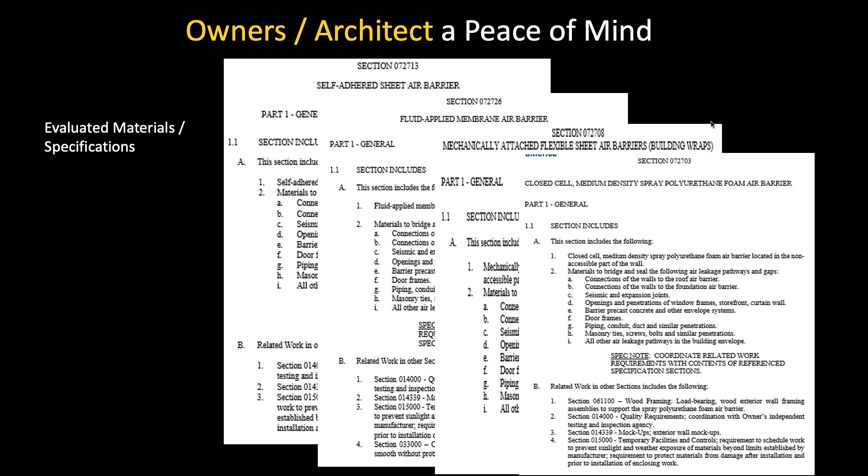So ABAA QAP - I'm going to touch on our three main stakeholders in our industry, starting with owners and architects. The QAP is there to give you peace of mind, helping you know that you're getting evaluated materials to our industry standards.

Focus on this primary barrier: if you specify the QAP, or the owner asks for it, you know you're getting trained and certified installers. What does that mean today? For the last 10 years, traveling the country, I've never heard an area say we've got so many great installers we don't know what to do with them - everywhere there's a labor shortage.

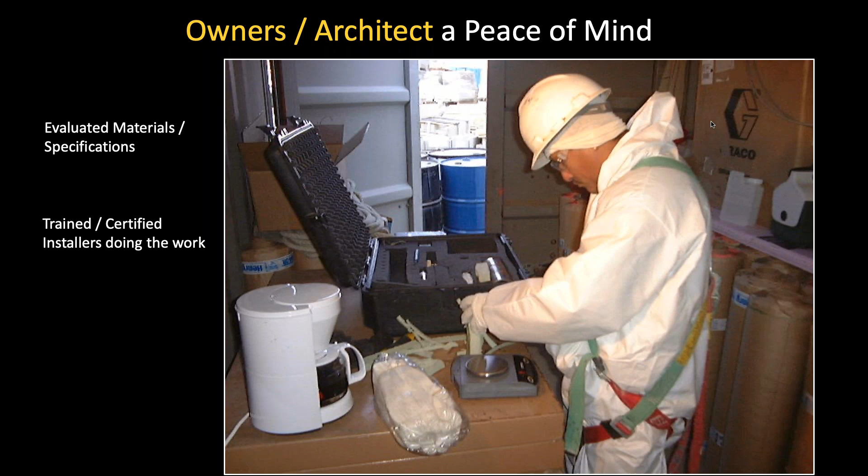With the QAP, you're assured that you have people trained on your project, and you're also getting a third-party auditor coming out to review the project - kind of like the scientific method: plan, do, check, act. Planning using the material specs, doing the installers, checking the auditor, and then we at ABAA do the acting and adjusting as we continue to evolve this process.

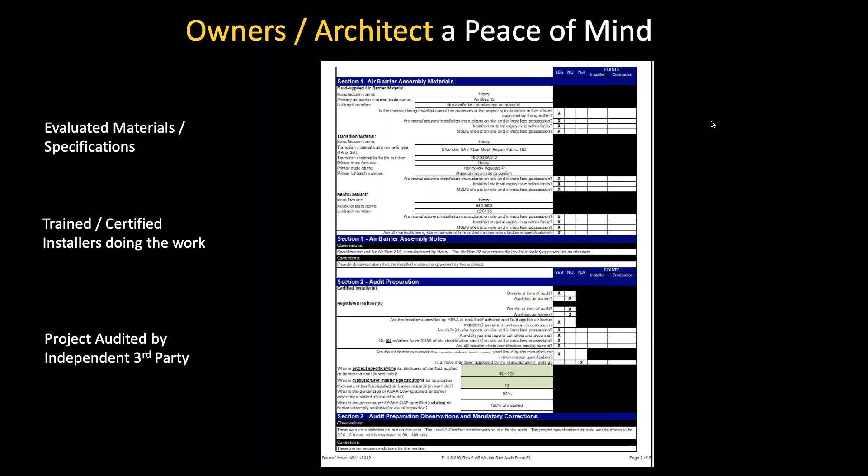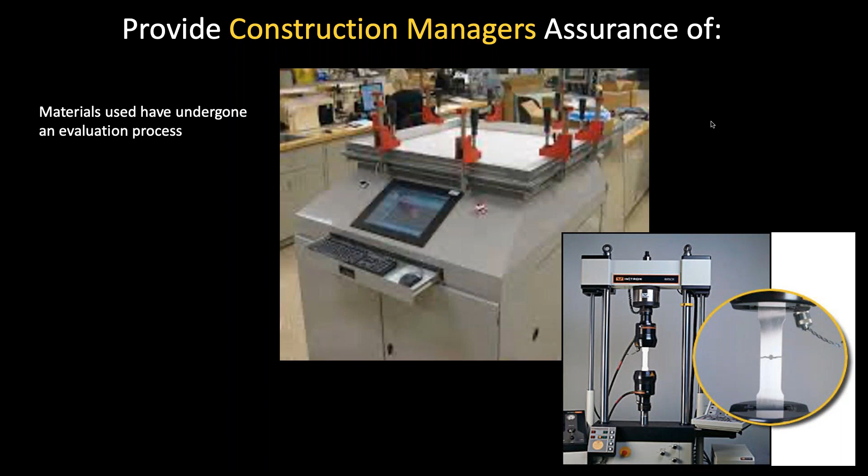If you're a construction manager, what are some of the benefits? Again, knowing you have good materials - there are a lot of different materials out there - this way you can compare apples to apples when you're bidding things out.

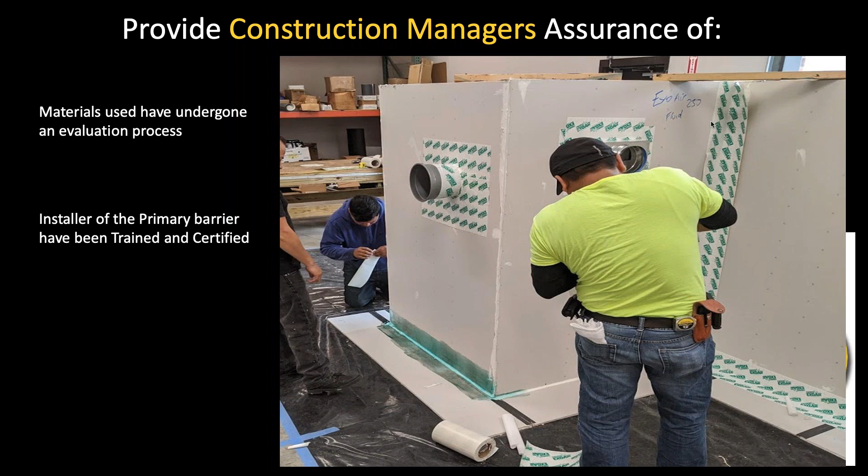Again, the idea of that trained, certified installer - these installers have to go through a 3-day training that requires them to pass a written exam. It's an ISO 17024 certification program. And then again, having that auditor come out, that third party, another set of eyes for your project.

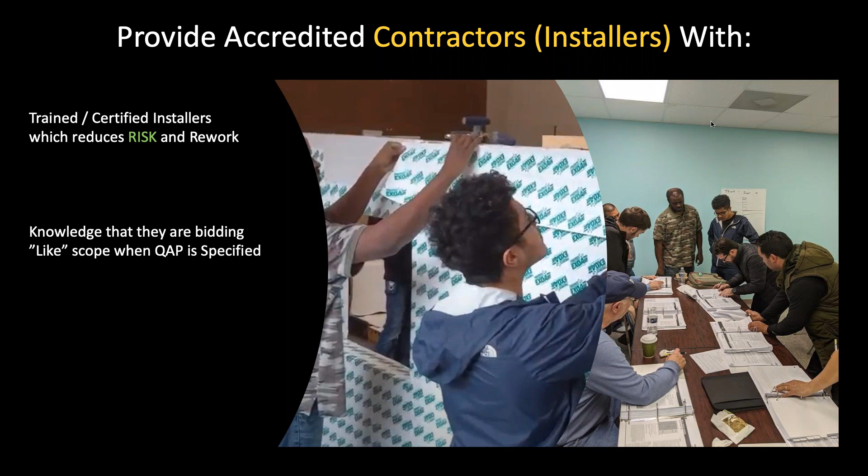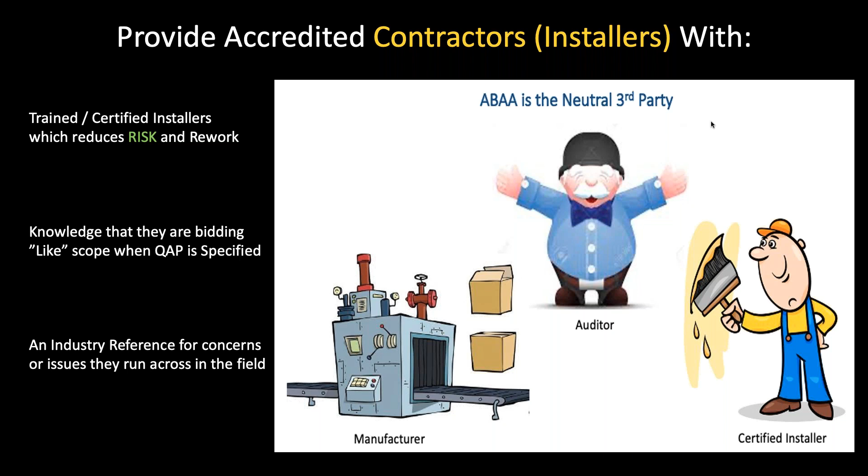And then for our accredited contractors with their certified installers, I have to believe this is also reducing your risk, knowing that your people have been trained and reviewed, and they know what's going on out there. When you bid projects that have the QAP in it, you should be bidding like scopes against your competitors. And if you have projects that have some sort of problem, be it with a material or with a construction manager, ABAA can be that third-party neutral person to help out in between.

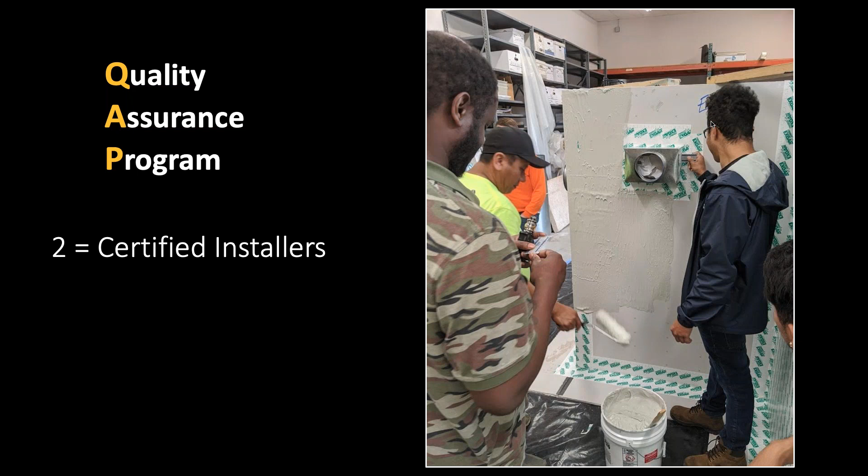So again, our QAP program, it's as simple as 1, 2, 3: evaluated materials, using that certified installer, and having a person coming out to audit.

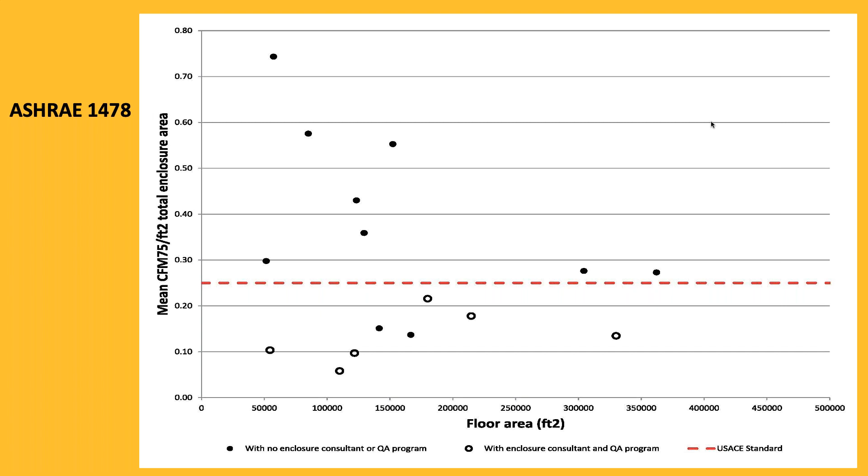Ironically, ASHRAE did a survey about 8-10 years ago, wondering if projects that use a quality assurance program perform better. Lo and behold, not very surprisingly, they do. That's what this chart is showing you right now.

So again, just a real quick high overview: our Air Barrier Association's quality assurance program is as simple as 1, 2, 3 - evaluate materials, certified installers, and having the auditors come out and review. Thank you, Ryan.

Ryan, you might be on mute. There we go, all right.

Thank you, Brian, for that. So I'm going to get into a little bit more of what we're going to go through - so just bear with me.

Okay, so I'm going to do 30 seconds in regards to some fun facts about the QAP. So Ryan, can you put your slides on presenter mode? Sure. There we go.

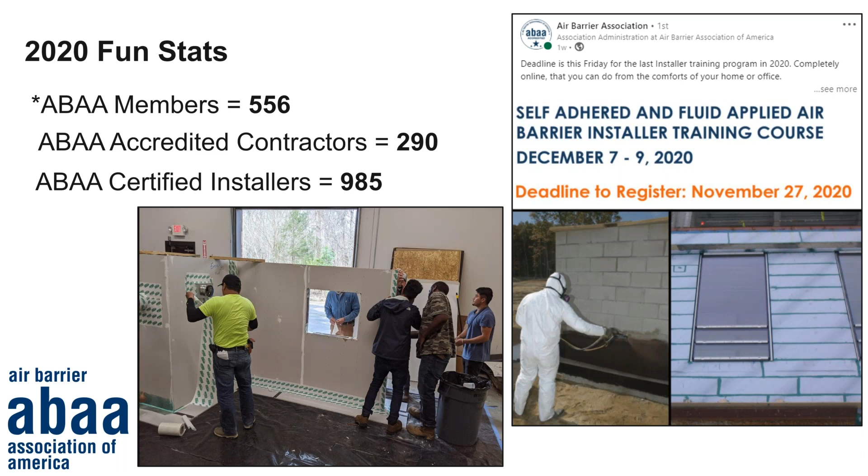Some fun stats: 556 members, 290 accredited contractors, and 985 certified installers for the year. Membership was our highest ever. QAP projects: 2,169, and we had over 8 million square feet of opaque wall area that was specified in 2020.

Another thing that we do to support the QAP and the industry is education - education to general contractors, design professionals, and so forth. So we trained a tremendous amount of people over the year and actually made a few different records again. In a year with COVID, we were pretty proud of that.

So that's all I'm allowed to talk about statistics, because I'm going to get in trouble - I'm speaking too much. So let's get into the meat and potatoes of some of the discussions with our panelists. I'm going to go through and do an introduction of them, and then we're going to ask a few different questions. So our first panelist, an architect's perspective.

So Andrew Dunlop is on our board of directors, along with the executive committee. He is co-chair of the research committee, so has spent quite a bit of time looking at some of the issues. He works for a company called Smith Group, a large architectural firm in the United States, and he is the principal of their building technology studio. So Andrew, if I was going to ask you a question as an architect - why is the QAP important for you to make sure you have a good project?